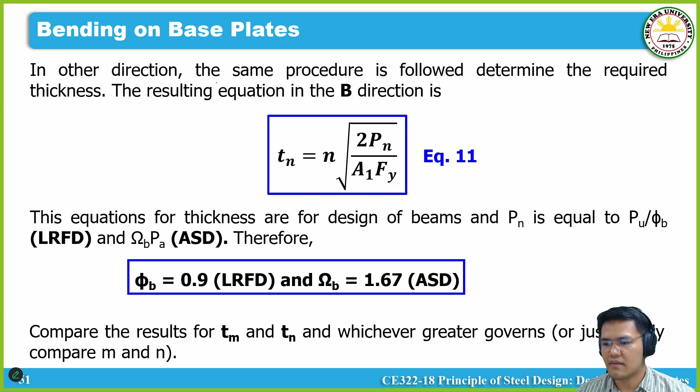Okay, sige. Problem number 1.

Determine if the 30 mm thick base plate is adequate in supporting service loads of dead load equals 500 kilonewton, live load equals 1,320 kilonewton from a W10 by 60 column. The f'c of the concrete pedestal is 28 megapascal. Use A50 steel and LRFD.

A. Determine the value of A1 and A2 in millimeter squared. B. Calculate the design bearing strength of concrete in kilonewton. What is the adequacy? C. Define distance M and N in millimeters. D. Compute the factored axial load that the base plate could support in kilonewton based on flexural strength of the base plate. E. Find the required plate thickness in millimeter based on the applied loads.

Find the DCR. Okay, sige. So this is example problem number 1.

Anong type of problem to? Investigation, design, or design? Actually halo eh, halo siya eh, kasi given yung mga dimension, as you can see given yung dimension, given din yung loads. Tapos iba-iba yung mga pinapahanap. Actually ano to eh, parang adequacy problem to, no? Adequacy type of problem.

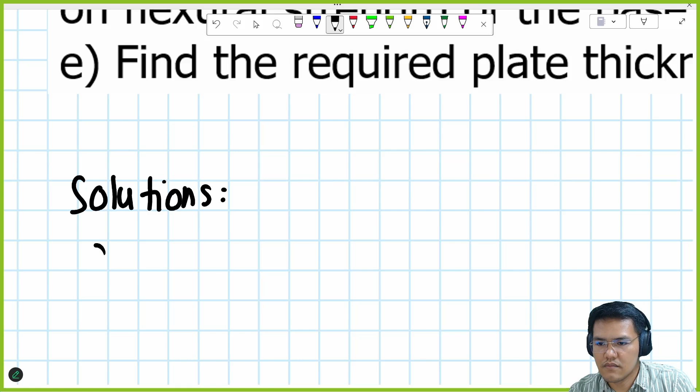Okay, so yung problem number 1, okay, or item A. So pinapahanap yung base plate area and yung A2, which is the dispersion, no? Dispersed area dun sa concrete. So yun yung term na ginagamit ko dito, okay? So sige, calculate natin yung mga area na yan, okay?

So area 1 and area 2, okay? Now, obviously, no, if we would calculate yung area 1, well, basic to, no? Area 1 is simply the area of your base plate. So this would give you, based dun sa given, base plate mo is 450 times 350. So meron tayong value, okay?

Actually, ito yung pinakamadali, no? Yung area 2, ito yung medyo mahirap. Okay? Anyways, discuss natin kung paano gagawin. So ilan to? 157,500.

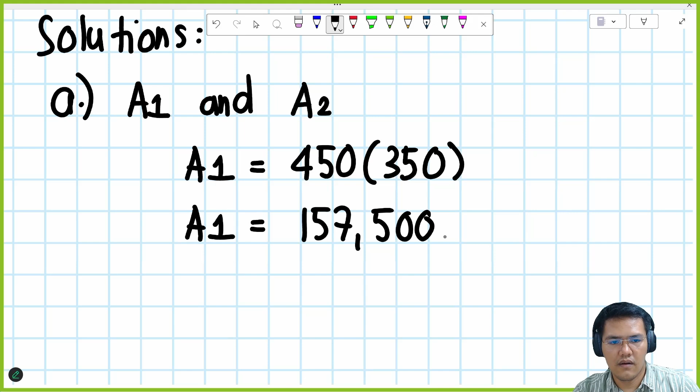In terms of the area 2, so I would prefer na i-detail siya. So kailangan natin ng sketches, okay? Kailangan talaga natin ng sketches para mas ma-visualize. Okay, so ano definition natin for area 2?

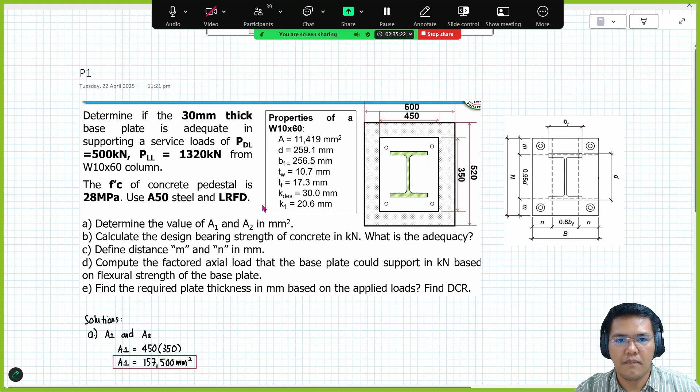Sige, kuha tayo ng rectangle. So blue for the area ng ating base plate. And ang sabi niya, ngayon medyo i-ano natin, pattern natin dun sa actual size, 450 and 350. Sabihin mas malaki dun sa side na to, okay, mas mahaba sa side na yun. 450 and 350. Yan, okay?

And somehow, it makes sense, no? Tapos, ang sabi niya, yung orientation ng wide flange mo, pag ganyan, okay, pag ganon. So, siguro, on this one, pwede nating sabihin na okay? And then yung ano mo naman, yung concrete pedestal mo is 600 by 520. So parang ganon pa din, no, mas malaki pa din yung parang pinaka sa side na to, okay? Mas malaki pa rin yung side na yun, okay?

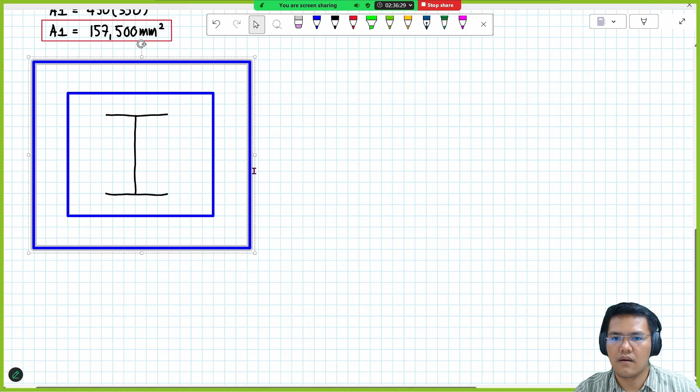Okay, so yan. So yan medyo, malapit na siya dun sa talagang dimension, okay, for the sake of demonstration. And we could ano, eh, no, we could draw siguro yung mga concrete pedestal, babaguhin ko yung kulay. So gawin natin tong ano, yeah, okay.

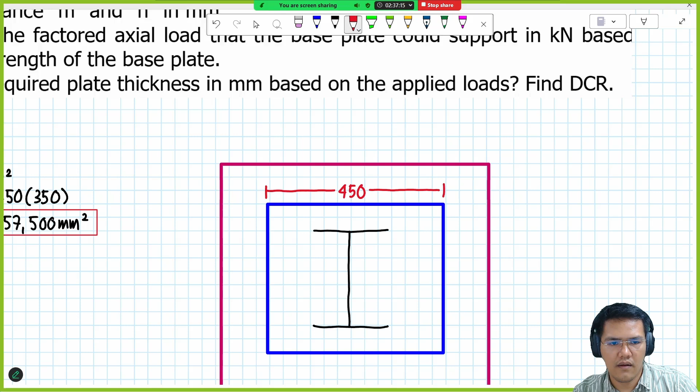So meron tayong mga dimensions again, for example, itong side na to, okay, this is ano, no, this is 450, okay. While itong side na to, okay, this one is ano, 350, okay. Yung side na to is 600, okay. Paki-correct na ako if I'm wrong, no, pero yan yung pagkakaalala ko. So yeah, yung side naman na to as 520, okay.

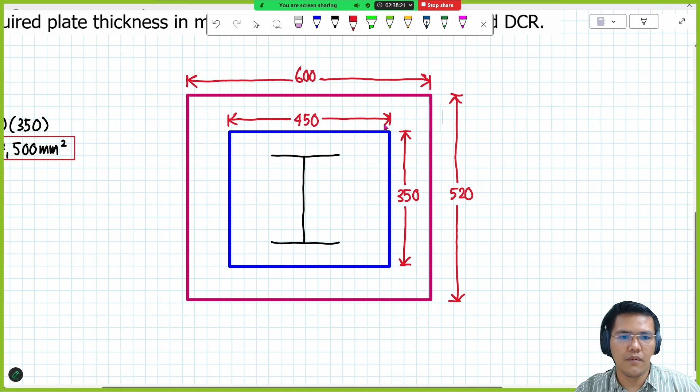Now medyo malinaw na, no, yung ating geometry, okay. Now in terms of the elevation, okay, in terms of the elevation, kung titignan mo siya sa elevation, ito yung makita mo, okay. Meron kang base plate, so sabihin natin yung thickness ng base plate. Tapos meron kang pedestal, no, concrete pedestal. So assuming na yan yung concrete pedestal, no? And then you have yung column, no, you have your column. So sabihin natin sa column, um, yeah, siguro ikunin na lang natin dito. Okay, yung outline ng column, yung edge ng pinaka wide flange mo andito. Okay, yung kabilang side. Okay? Okay, so yan, ito yung elevation, ito yung plan.

Okay, so ang next step is to calculate yung area 2. Okay, and ang question is paano ba, no? Paano ba siya i-calculate? Well, ang sabi natin, from the dimension of base plate, i-disperse mo lang siya.

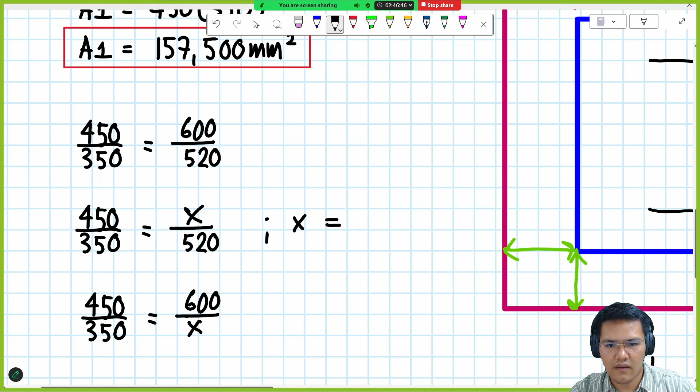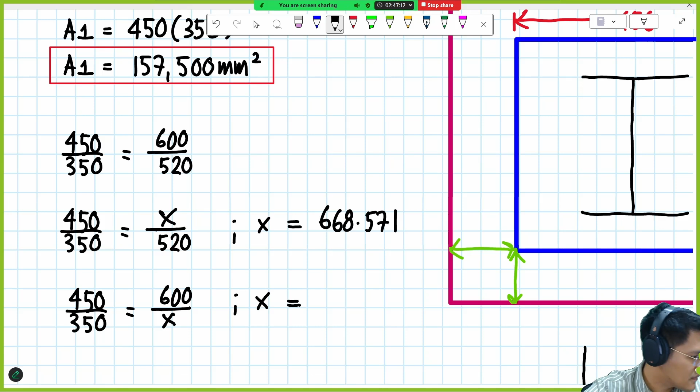Okay, ano yung value ng x dito? Para solve the equation na to. 668.57, 143.

Let me just double check, no. 450, 350, okay? Yung counterpart niya is 600, 520. So 520 ba yung distance natin? Yeah, 520 naman. Okay, so yung iba ba ganito rin na-calculate using this equation? Similar lang yung value ng x nyo? Yes po, sir. Okay, sige.

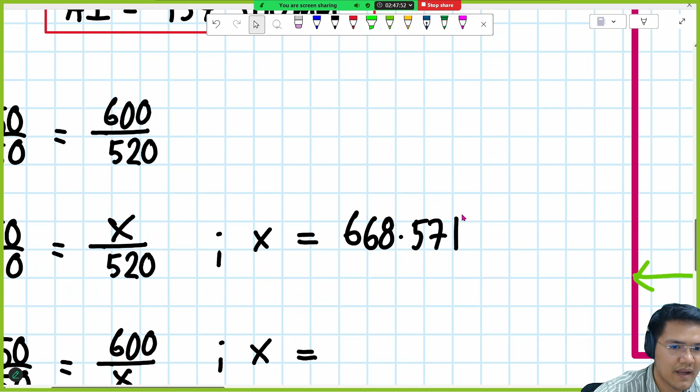Let me, sige, pag-ulit, x is equal to 668.571 43 po. 43, okay. Millimeter, okay?

Similarly, yung next equation natin, okay, which is in-unknown natin yung denominator. So ilan to? Ilan to? 466.66667 po.

Okay, yung isa kasi dito is realistic, yung isa hindi. Okay? What do I mean by that, no? You can see here, no? You can see here na if we would follow yung ito kasi yung ratio, no? Ito yung ratio ng base plate.

So ibig sabihin, kung concentric yung area 2 with area 1, dapat it would follow the same ratio nung area 1, no? Pwede nating equate dun, yung area 2, paki-unmute muna, no? Based dito sa ratio na to. Okay? Ang question is, hindi natin alam kung sinong side ng pedestal yung unang marireach.

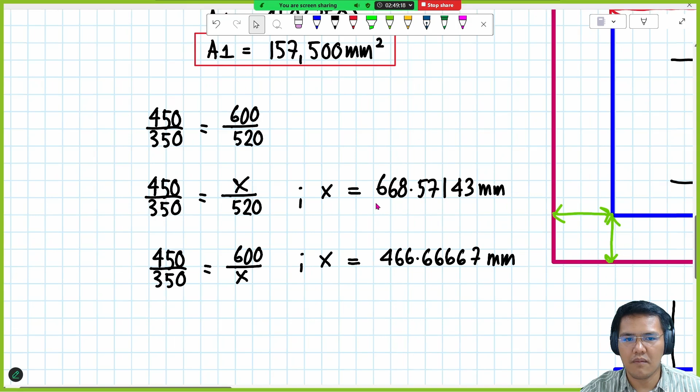Okay? So lumalabas dito, based sa first scenario, yung x mo daw, okay, assuming na 520 yung ginamit natin, is 668.57, which is obviously lagpas ka na dun sa side mo na value, which is yung limit mo na 600. Kasi lumampas na yung value, no? 668 yung daw yung kailangan mo to achieve yung 520 na side.

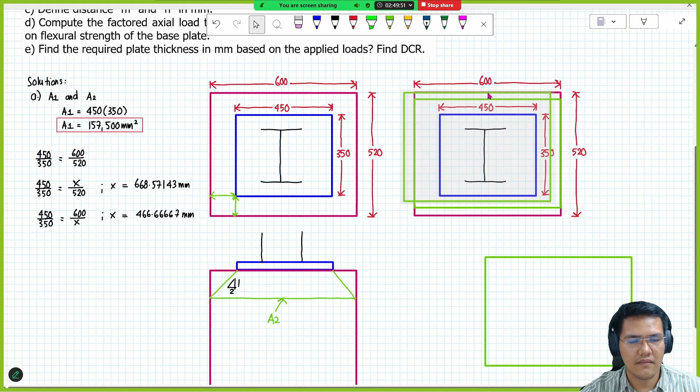So parang lumalabas doon, no? Parang lumalabas doon. Sa scenario na yon is na-achieve mo nga yung 520. Okay, na-achieve mo yung 520 na distance. Okay, let me. Ayan, okay? So na-achieve mo yung 520 na side na to. Okay? Pero yung length mo doon sa side na yon is 668.

Lampas ka na sa 600, which is unrealistic kasi wala ka na sa area ng pedestal eh. Wala ka na sa area ng pedestal. Now yung

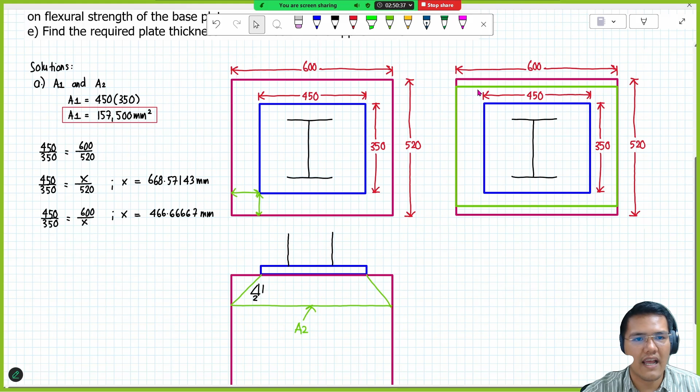Second equation, sabi niya yung x mo daw is 466.66. Yung side na ginamit mo is 600. So which means to say, no, ang counterpart talaga nun, dito tong una, no, ito talaga yon. So ibig sabihin, 600 yung side mo na to, tapos yung distance x na to, okay? Yung distance x na yan, okay?

Let me emphasize. Yung distance x na yan, is equal to 466.67, okay? Which is somehow it makes sense kasi pasok ka sa ano eh, pasok ka dun sa limit mo na 520, no? For the side ng concrete pedestal.

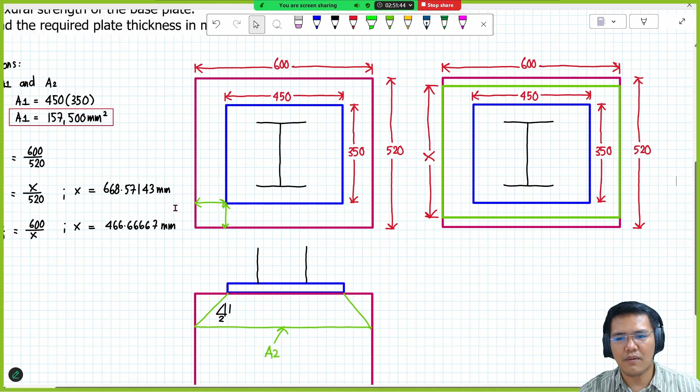Okay? So ibig sabihin, in short, no, yung ating area 1, okay, based dun sa logic na yon, okay? Based dun sa logic na yon, and based dun sa logic kanina, yung difference ng dalawang to, side na to, okay, is mas mababa kumpara sa side na to. Ibig sabihin, marireach niya, no, itong side na to kaagad, no, in comparison with this side. Okay? Or let me rephrase that. Ibig sabihin lang noon, yung distance na to, mas maliit kumpara sa distance na to.

Okay? Kaya yung expected mo na dispersion somehow looks like this. Okay? To achieve yung equal ratio ng ating area ng ating base plate. Okay? So therefore, no, let me ano lang, no. Yeah, basically you could say na this one makes sense, or sabihin natin governs, tama ba?

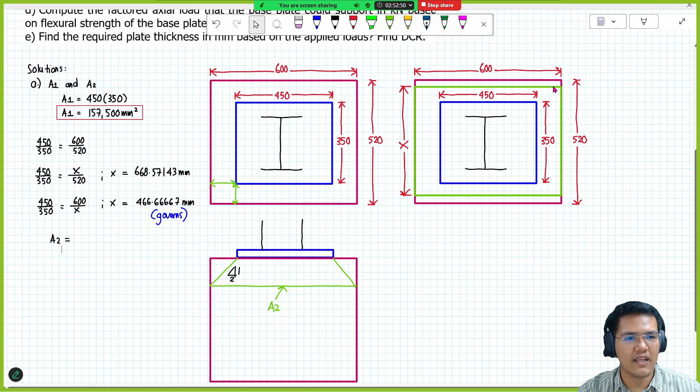Okay, and therefore the area 2, no, area 2 natin, okay, is simply equal to, okay, yung basis natin dito ng area 2 natin, yung green, okay, is simply 600 times yung distance x. Okay, so this would give you

So ilan to? 280,000.002 po. 280,000? 0.002. Tama? Tama ba? Apo, yun lang po, sir.

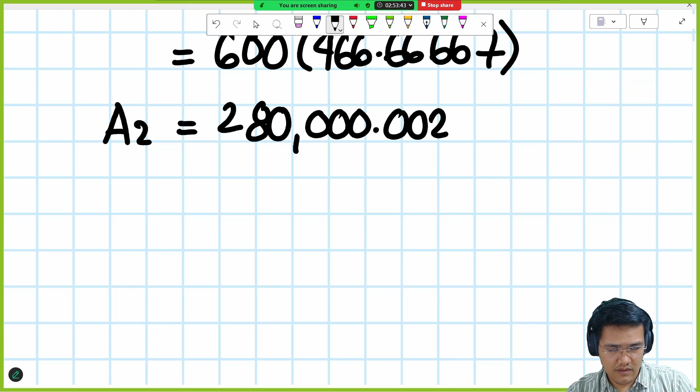Sige, okay na. So meron na tayong area 2. Okay na tayo sa area calculation. I think meron pang mas mabilis na explanation doon, no? Pero yun yung ano, yun yung parang pinaka-system na naisip ko dito to estimate yung area 2. Sana naintindihan niyo, no, kung paano ko siya kinalculate.

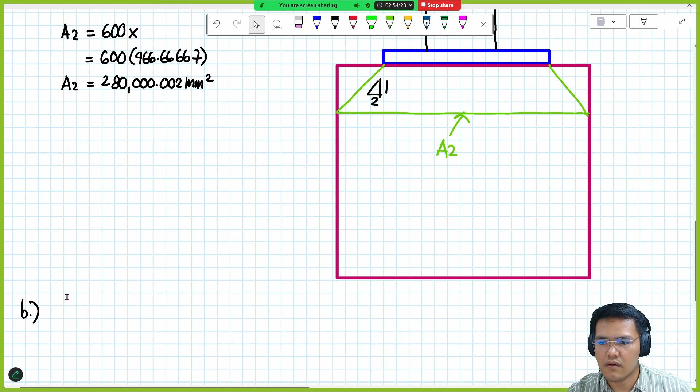And yung may bearing lang naman dito, yung concrete, di ba? Wala namang bearing yung ano eh, steel plate natin. Okay? So therefore, no, yung ating formula na gagamitin, no, as per NSCP would be ano, no? Sabi natin kahit isang equation lang i-memorize mo. Okay? 0.85 FC prime area 1 times yung ano, yung factor, no, na ng ratio ng area 2 over area 1. Okay? Tapos may condition dito, no, si code. This should be ano, equal less than or equal 1.7 FC prime, area 1. Okay? Okay?

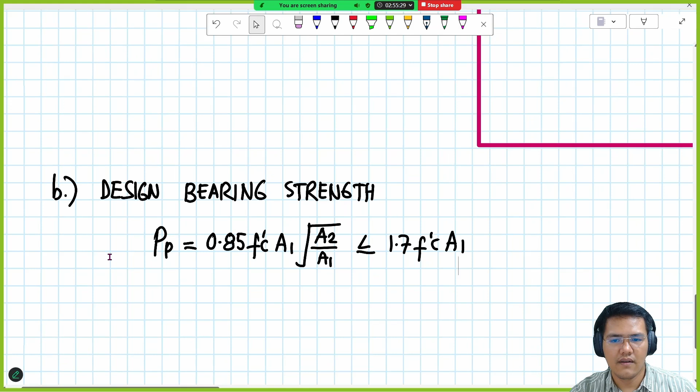This is just nominal pa lang. No? Again, this is nominal bearing strength. So actually, pwede natin itong equate to ano eh. Pwede natin to equate to ano, nominal. Okay? No? As per the code.

Sige, so i-calculate natin to. So we could say na yung nominal is equal to 0.85, okay, times yung FC prime. Ano ba yung pinagamit sa problem? So 28. Okay? The 28 day, no? Compressive strength ng concrete. 28 MPa. Okay? Yung area 1 natin as

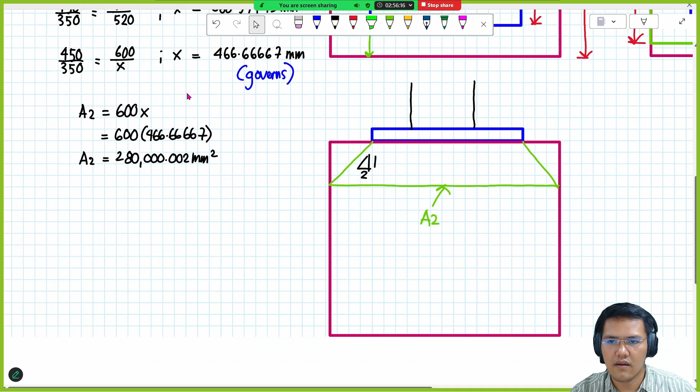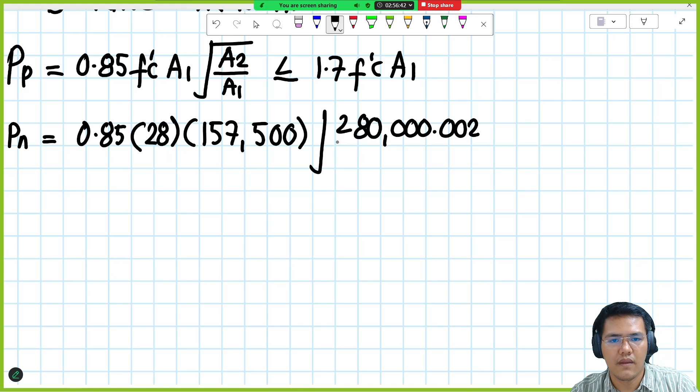This equation, and yung area 2, yung ratio ng ating area 2, okay? As per calculation, 280,000 daw. Okay? Divided by area 2. Okay? Area 1, sorry. Okay, so yung area 1 natin is this ano, this value. Okay?

Okay, and this should be compared with 1.7 times 28. Teka lang, before we continue, let's do a unit check first. Do we need to multiply anything here? Okay, so we'll only do this once.

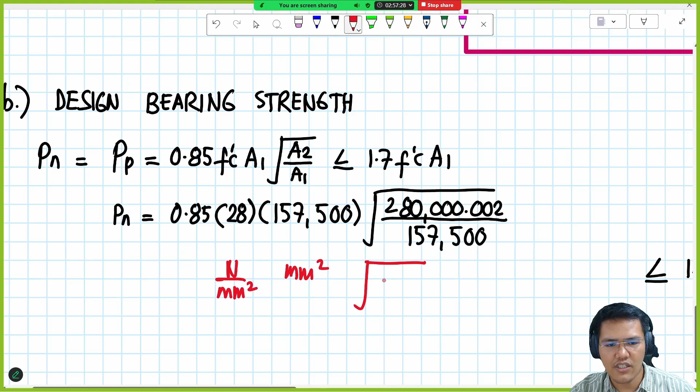So, MPa is 28, Newton over millimeter squared. This area is in millimeter squared. Then we have a square root here. As you can see, the unit of area is millimeter squared over millimeter squared, so they cancel out - meaning it's unitless. That factor of ours is unitless, since it's just a factor.

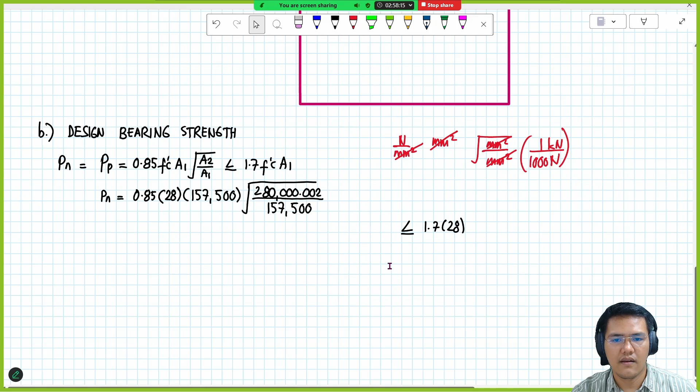Okay, so this cancels out too. Then Newton is what remains, so we need a conversion. If it's in Newton, this becomes kilonewton - divide by 1,000. So we need that conversion, divided by 1,000. Let's set that aside and divide this by 1,000.

Okay, let's continue our equation. This should be less than or equal to 1.7 times 28 times area 1 - this is our area 1. I think it's similar on the other side - this should also be divided by 1,000.

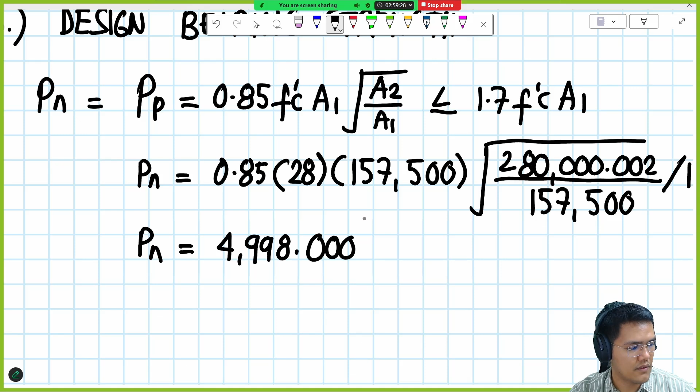Okay, less than or equal to. So what's the right hand side? 7,497. Is it 7,000? Yes. Can you double check? Correct? Okay, 7,000? 497? Exactly? Yes, sakto po.

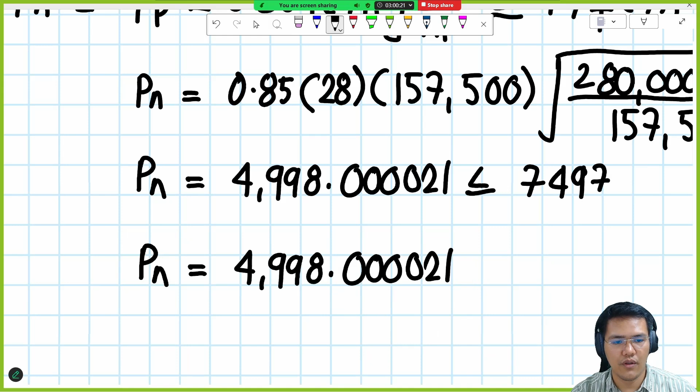Okay, so if that's exact, we could say the lower value - so we could say this is our P sub n, in kilonewton. Now this is just P sub n, but what we're looking for is the design strength, which is P sub u.

So this is bearing, so phi sub b times P sub n, right? So we could say P sub u equals phi sub b for bearing. What's our phi sub b for bearing? I think this is the lowest among all - if I'm not mistaken, 0.65. This is bearing, not bending on the plate.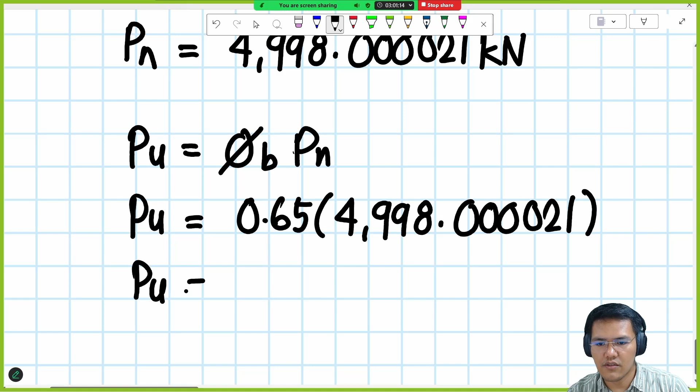Okay, P sub n. Okay, for this, we have the value of P sub u. So there it is. 3,248.70001. Okay, kilonewton. This is the design bearing strength of the concrete.

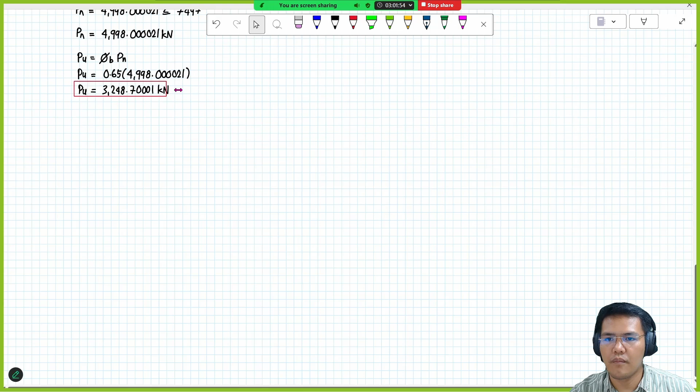Now there's an additional question: what is the adequacy? Well, let's just compare it - this is the capacity of the concrete in terms of bearing. Let's compare it to what's due to load. There are given loadings here - service loads: 500 for dead load, 1320 for live load.

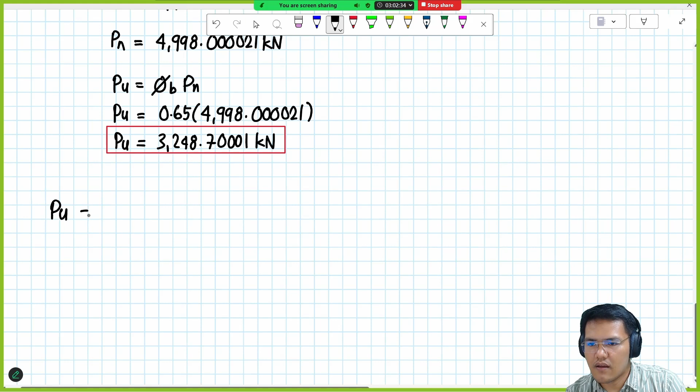Let's get that - P sub u is simply LRFD: 1.2 dead load plus 1.6 live load. So plugging in the values, you would have 1.2 times - dead load is 500, right? 500, 1320.

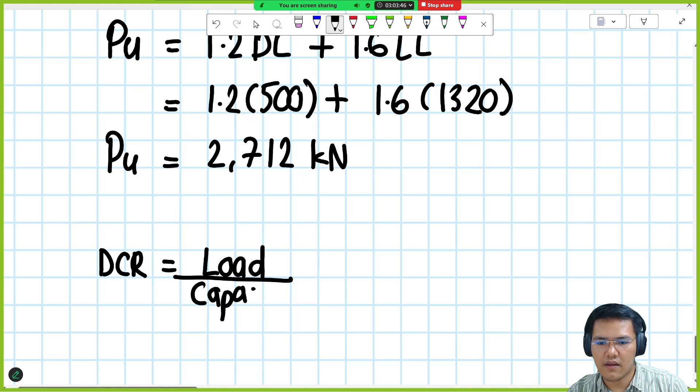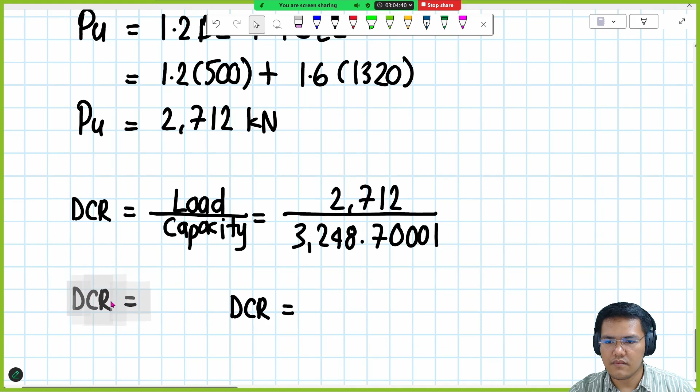Now that we have two values, we can calculate the DCR. The DCR is simply the load due over the capacity of your section - specifically, the bearing mode of failure. So we'd have the load of 2,712 divided by what we calculated earlier. So we have the DCR - how much is it? 0.83.

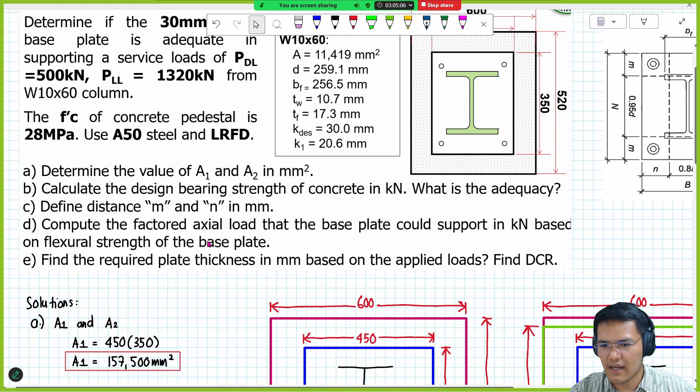Okay, we're done with problem or item B. We could now proceed to item C. Item C is to define distance M and N, in preparation for the calculation of bending on the plate.

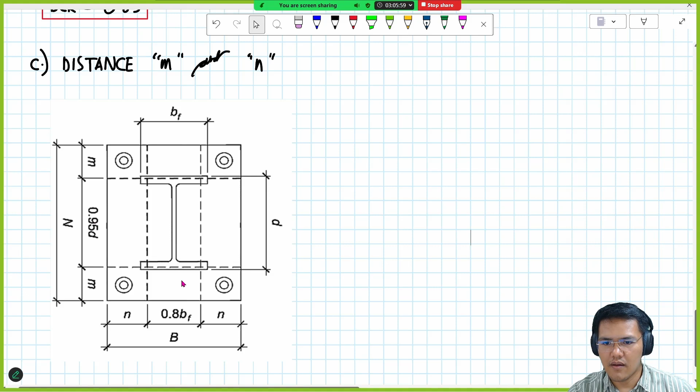Okay, and the formula - the best thing here, as I mentioned, is to memorize this. Okay, this figure. So the rule is that the depth of the wide flange is along N and M, and the B sub F of our flange is along capital letter B, and the distance N.

So our formula for M and N side, based on this figure, is simply: the M you calculate, you get from N - that gives you N, minus - the total distance here is M, N sorry, this distance is 0.95D, then divide that by 2, to get the distance M. Okay, it's just like that.

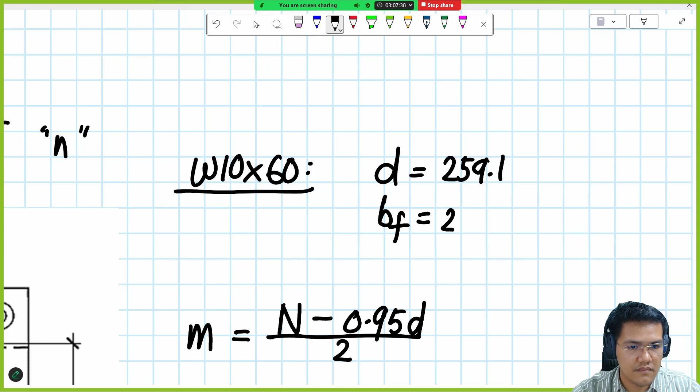Okay, so plugging in, we would have... repairing, dapat yung orientation na to, okay, orientation na to, similar kung ano yung orientation sa problem. Okay, so halimbawa ito, dapat similar. So we could actually copy this one.

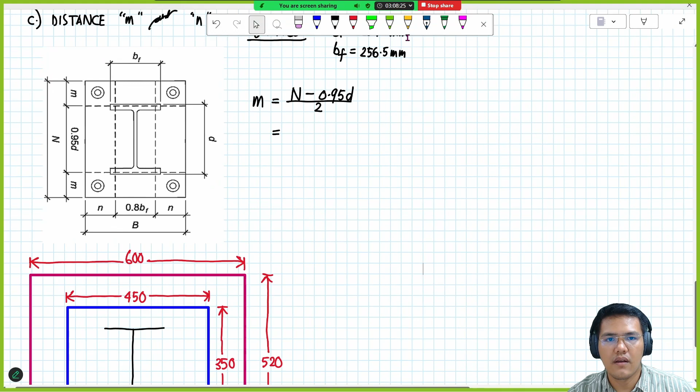Now on this one, meron counterpart si capital letter B and N. Halimbawa, yung capital letter B, ang counterpart niya nasa side ng base plate, yung blue, itong 450. So si 450 yung N. Similarly, yung mali pala, no? Yung capital letter B is yung 450. Okay, let me correct that. So lipat ko na lang to. This one is sa 350. Yung 450, ito yon.

So plugging in dun sa values natin, sa formula natin, we could say na yung M natin is N, which is 350. Minus 0.95, yung value ng D natin, 259.1, divided by 2.

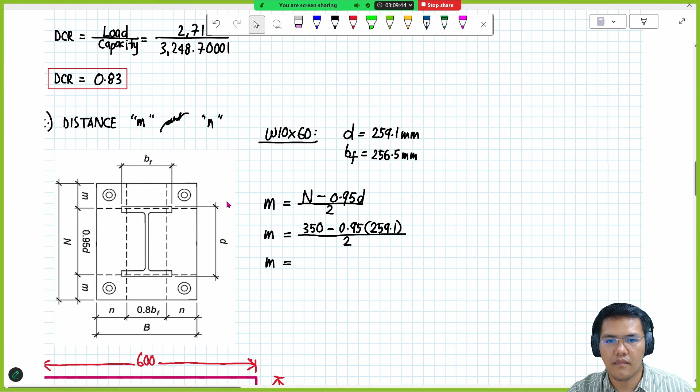For distance M, meron tayong distance M. So ilan to? 51.9275.

Millimeter. And then yung side N naman, itong small letter n, B minus 0.8 B sub F, divide 2. Capital letter B minus 80% daw ng B sub F, divided by 2.

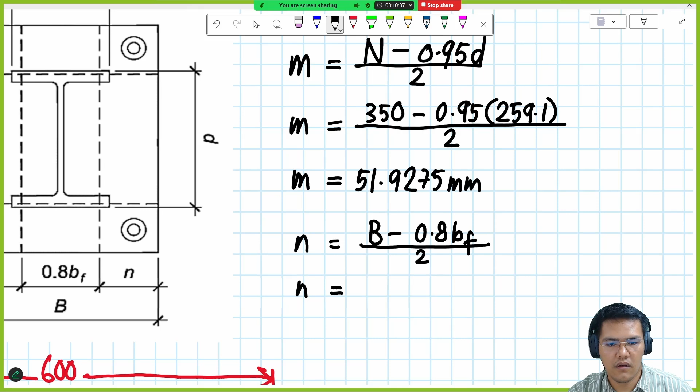So yung letter B natin is 450, based dito sa figure. B sub F is 256.5.

So meron tayong distance N. Ilan to? 122.4. So obviously, mas mataas siya sa M.

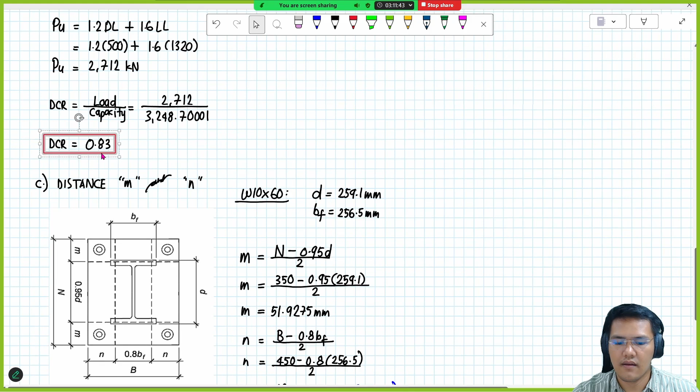Okay, this one would govern. Yung N, yung N yung mag-governs, in terms of thickness calculation ng plate. So we could say na, sige, highlight na natin. Yung N yung mag-govern.

So tuloy tayo sa next item. Compute the factored axial load that the base plate could support in kilonewton based on the flexural strength of the base plate. Sa item D, factored axial load based on the flexural strength of the base plate. So hindi pa tayo pinapahanap dito ng thickness. Kumbaga ang sabi niya rito, based dun sa actual thickness na provide, which is 30 mm, ano yung maximum factored axial load, in terms of flexural strength ng base plate.

So yun lang yung ibig sabihin niya sa item D. So actually, dapat inuna muna natin yung item E, kasi gagamitin natin yung M and N. Pero it seems na mas nauna yung ating values. Kumbaga mali yung order ng ating mga questions. So siguro rearrange na lang natin. So ito yung gagawin nating item D, at ito yung item E, continuation ng item C.

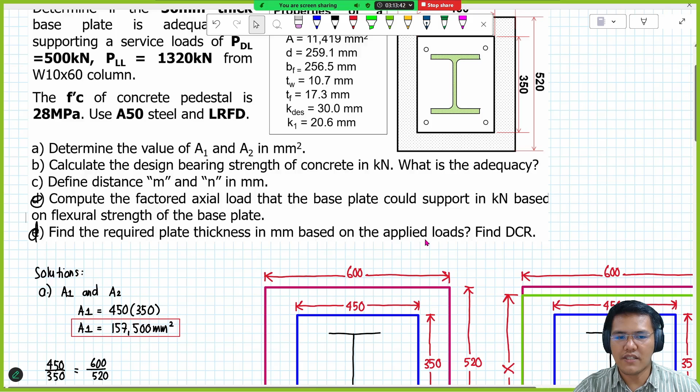Find the required plate thickness in millimeter based on the applied loads. Sige, masyado na malayo, dito natin ilagay.

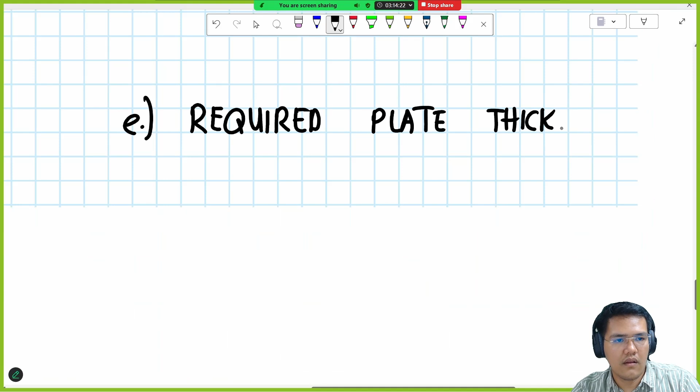In terms of the formula ng plate thickness natin, as per our derivation, dalawa yon. It's either ito, o this one, pares lang yan. Ang nagbago lang doon yung N, yung subscript. Ang rule natin is kung sino yung mas malaki na value ng M and N, yun yung mag-govern. So as per calculation, ang nag-govern is si N. Ibig sabihin, ang mas critical dyan, ang mas malaking value dyan, yung T sub N, na parameter, at N yung gagamitin natin na multiplier.

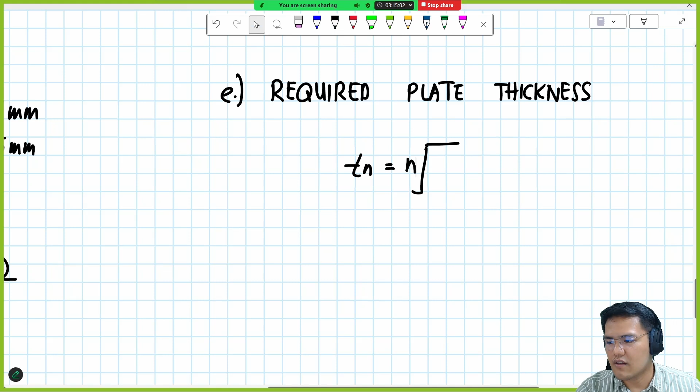Square root, kunin natin yung rest of the formula na na-derive na natin kanina: 2 times P sub N over area 1 F sub Y, area 1 times F sub Y.

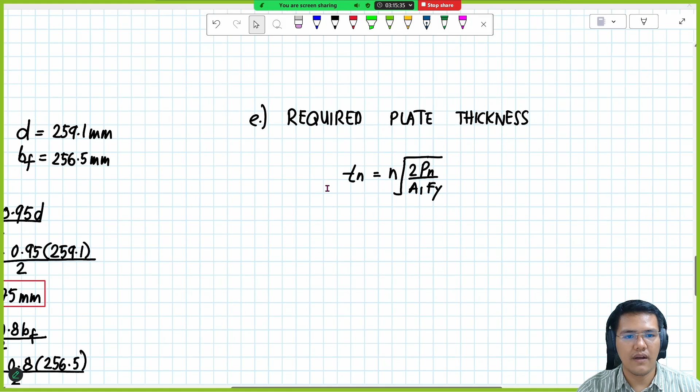Yung take note lang, yung P sub N should be converted depending kung ano yung design philosophy na pinapagamit. Halimbawa, LRFD tayo, ibig sabihin yung P sub N natin, kung LRFD tayo, yung P sub U is equal to P sub bending on plate phi sub B times P sub N, for LRFD. Okay, we could rearrange this one and we could make it P sub N is equal to P sub U over phi sub B. Basically, ito yun.

Right, to take note lang, for bending on base plate, ito yung mga factors na gamitin natin. Under strength, phi sub B is equal to 0.9.

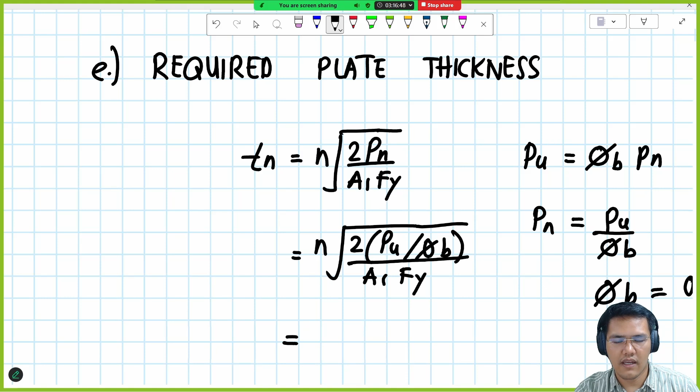So therefore, we could say na, yung sa formula natin, T sub N is equal to square root of 2 times, yung P sub N natin would be P sub U divided by phi sub B, divided by area 1 Fy. Plug in na natin yung mga values. N natin is 122.4.

Okay, 2 times P sub U natin. Since this one is due to loads, alam natin na yung P sub U due to loads na nakalculate natin kanina, applied loads, is 2,712. So we could use that.

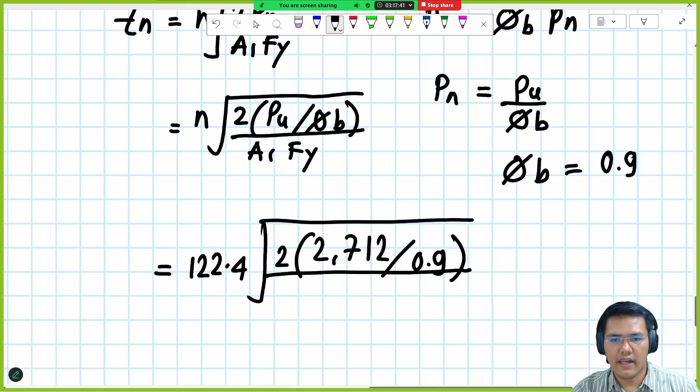Plugging in and divide this one by 0.9. Square root of, divided by area 1. Area 1 natin is nakalculate na natin kanina, multiplied by F sub Y.

Ano ba yung steel grade? So A50, steel, yung base plate natin. So A50, yung F sub Y niyan is 345.

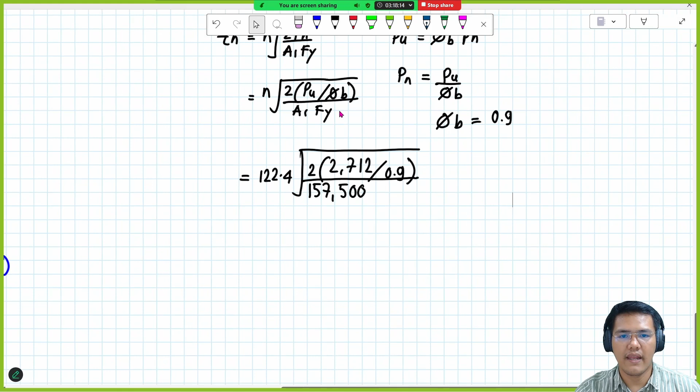Okay na tayo, but I'm not sure in terms of the unit, so we need to check yung unit. Let's have a quick unit check. Itong N is millimeter, square root. Yung 2,712 kilonewton yan. So I think just to be similar, kasi itong area dito is millimeter squared, yung 345 is Newton per millimeter squared.

So we need to convert para express natin in terms of similar units, itong kilonewton into Newton na lang. Numerator, denominator itong kilonewton, 1,000 Newton. So mangyayari ngayon, this one would cancel out, itong kilonewton cancel out, yung Newton dito cancel out. So kailangan lang natin i-multiply ng 1,000 yung numerator dito. Always multiply yung numerator sa loob ng square root to 1,000 for the conversion.

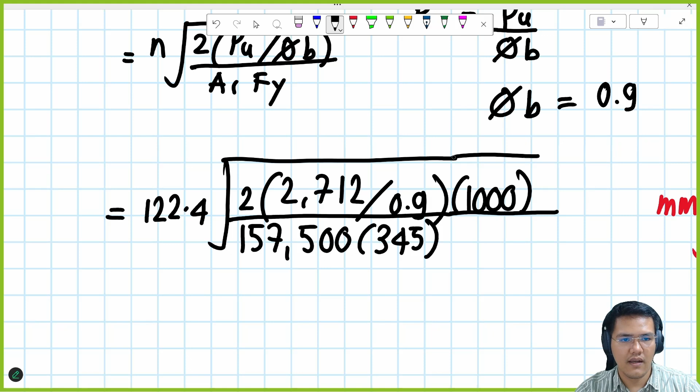Okay, sige, so ilan to? Itong pinaka T sub N natin, yung thickness of plate natin na required para buhatin yung load PU natin. Ilan yan? 40.76338 millimeter.

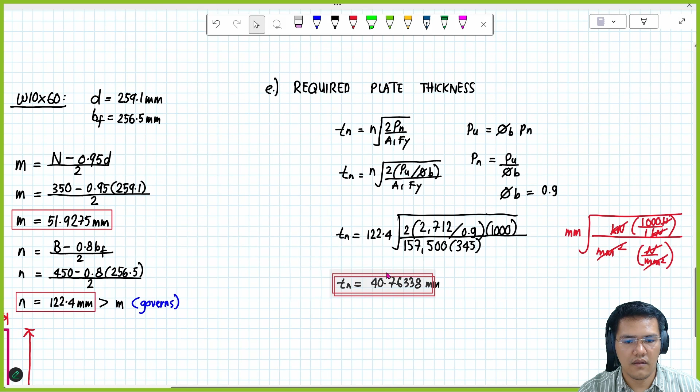This is item D, not item E. Okay, pinagpalit natin, last item, yung item E natin. Compute the factored axial load that the base plate could support in kilonewton based on the flexural strength of the base plate. So yung base plate mo, actual thickness niya is 30 mm. So meron niyang strength. The question is, based dun sa flexural strength na yon ng 30 mm, ano daw yung factored axial load?

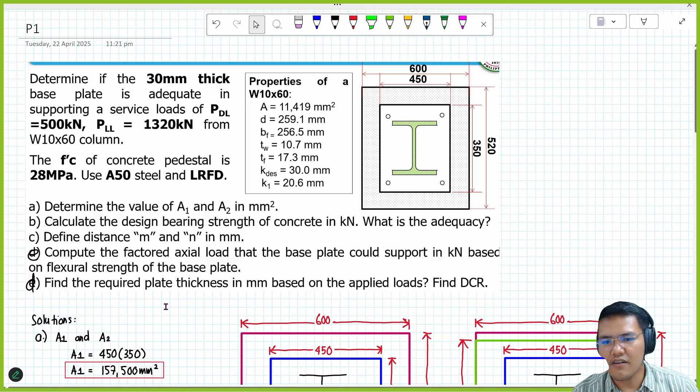Well, we could again plug in dun sa equation natin. Ganun lang, parang nilalaro lang tayo. Anong problem, so ang gagawin mo, kapag kasi bending on factored axial load, i-take note ko lang na this is bending ng base plate. Well, wala ka namang ibang formula na gamitin, kasi isang formula lang naman yon, and yung formula na pwede natin gamitin dito is yun nga, T sub n man yan.

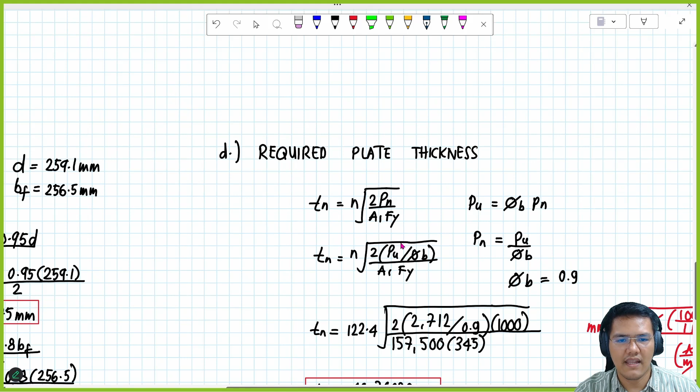Yeah, we could copy na lang. Okay, ito, idamay na natin, para hindi na tayo magde-derive. Kasi sabi niya factored eh. Ayan lang. So gagawin natin dito ngayon, substitute natin yung thickness, T sub n, which is 30 mm as per the problem na given.

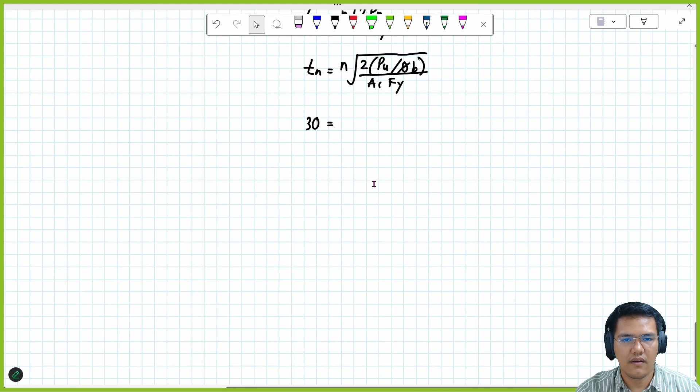Okay, yung n, so I think on this one, I could take advantage ito. Yung P sub u naman, kasi ito yung factored load, ito yung unknown. Yan yung unknown. The rest of equation is parehas na parehas lang, so meron tayong value ng P sub u.

Basically ito lang yung maximum factored load na pwedeng kargahin nung base plate mo based on bending on base plate. Well, mapapansin mo na ang required as per analysis natin sa thickness ng plate is 40. Tapos yung PU natin is 1468.9.

Bakit ganun? So tama ba to? Paki-double check nyo nga ito. Ganito rin ba yung nakakuha ng iba? Similar lang? Tama? Okay, sige. Tama, tama, kasi bakit naging tama?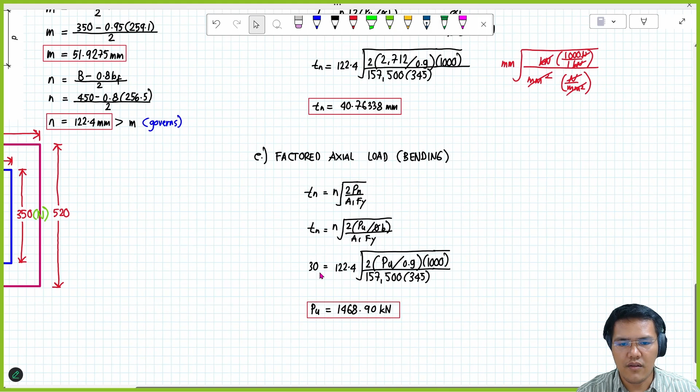Kasi limit yung thickness mo, liliit din yung load PU na kaya niyang buhatin. As you can see, yung based dun sa load na 2712, yung appropriate thickness is 40 mm. So mas mataas yung load, mataas yung thickness. Lumiit yung thickness, liliit din yung load. So it makes sense.

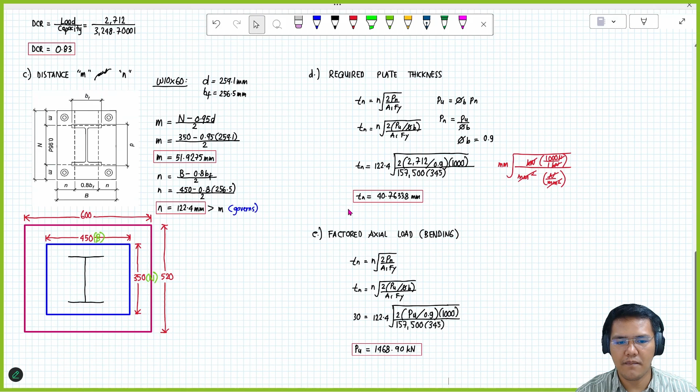Yun lang yung ibig sabihin nung item E. Dun sa D, meron pala siyang tanong, find the DCR. So on this one, in terms of the flexure, based dun sa required, may mali. So on this one, yung DCR na tinutukoy niya supposedly ipapasok dito kay E. Kay E yun, so based dito sa PU na to, as continuation, ano ba yung DCR niya?

Ano ba yung DCR niya? Well, ito yung capacity based on provided section, and i-compare lang natin with the loads. Mabilisan na lang. So ito rin yun, ulit na ulit.

Yung numerator, yung due to actual load, hindi naman babago yun. Pero itong denominator, ito kasi yung capacity talaga based on 30 mm na thickness ng plate. So ibig sabihin, bagsak na tayo. So ilan to?

Ilan yung 1.846? 1.8? 3. 1.83. Tama? 1.85 po, sorry, 1.85. Okay.

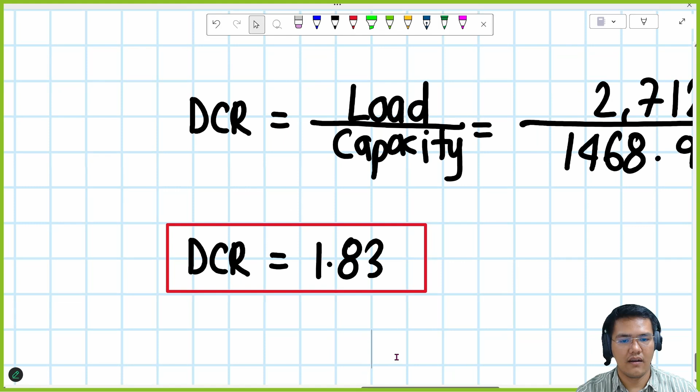Sige, sige, okay na yung problem number 1 natin. Any questions or clarifications? Meron bang malabo in terms of parameters, mga calculations? Okay, sige.